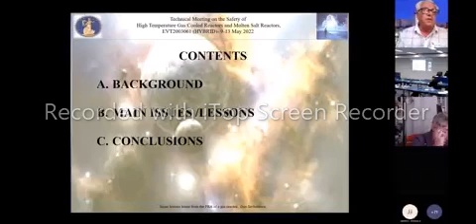I would like to draw your attention to the fact that many of the things I'm going to say may now look common, but these are lessons derived by 2002, 2003. It proves that they are more or less confirmed by further results of the community. So the background of this presentation, the main issues, and some conclusions.

The background is this experience from PBMR, but not only, because all my life I performed safety and risk analysis, real ones, at the grass level operation work. As far as PRA is concerned, PRA in PBMR was a real challenge because the target was threefold.

From one side, we had to derive a list of postulated initiating events, which was quite in clouds by that time. Another task was to support the design, actually to do it, not only to talk about it. And the third was to develop a PRA at least of class 2, if not class 1, in accordance with ASME classification, so that it can be used for licensing. That means it had to be in accordance with the standards, and we followed the US NRC standards, NUREG 2300, NUREG 1150, and so on.

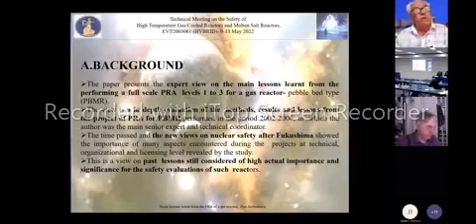On all aspects, including the way the team was composed, the organization, we were actually working as a project with limited budget, limited time and tasks, and people at various levels of knowledge requiring training. So this was a real life task.

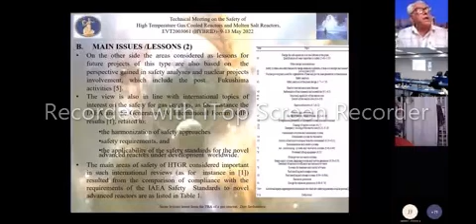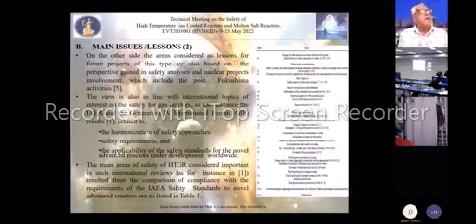Related to what we can derive from that, I realized later on, recently, when I looked in various IAEA documents, that more or less the topics I'm going to talk about are identified as issues which may require more attention, if not change, when we talk about gas reactors, in order to be in compliance with the existing IAEA guidances and requirements.

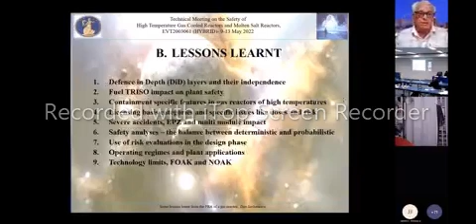These are the lessons learned. I will refer to 9 of them. There are a lot of them, but I thought these 9 are representative.

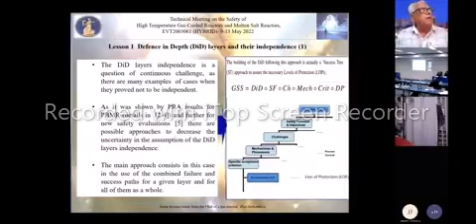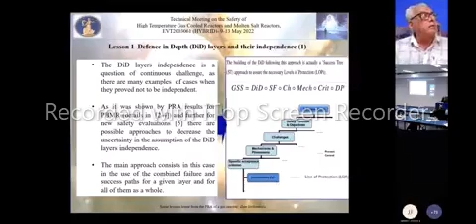The first one is related to the way we had to define what defense in depth actually is for this plant. Here we had to give answers to two types of questions. The first was how independent are they, and the second was what kind of method do we use to show that we cover the line of defense from one level to another, which, as you can see, may lead to a situation where we have an uncovered feature of a line of protection at one level, say level 3 or level 2, then it has to be covered at the next level.

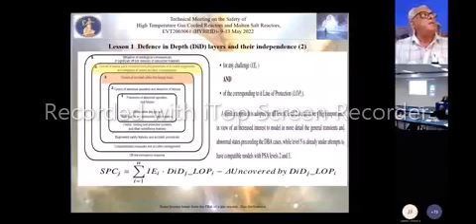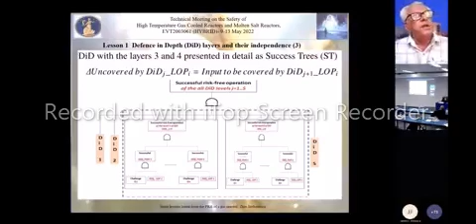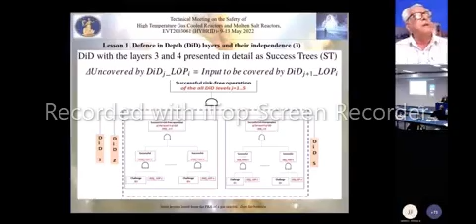So in order to model that, we can and we did use a combined approach. We didn't invent anything, because the combined approach of success scenarios, how to do it to succeed, and failure scenarios, which are the probabilities that the systems, the barriers assumed to assure the protection for a certain line of defense, will fail. So there's a combination of success and failure approaches. This was not new, and it existed, as you can see here.

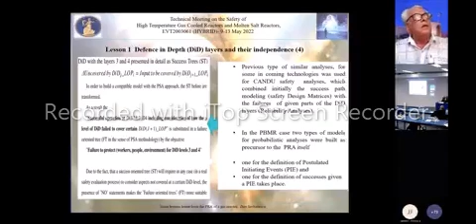I was inspired, I recognize that, from the CANDU philosophy, which in the 70s used this combination of success path modeling, the so-called safety design matrices, and fault tree modeling, the reliability analysis for important safety systems. From these two combinations, they were actually screening as completely as possible at this level of study the capability of the plant to cope with various initiating events.

Then we had to derive the list of initiating events, and for that we built a model. The model was built in RiskSpectrum in a network format for the whole team. We had 3 persons in the team, each with their tasks. We interacted with engineering and CFD calculation, deterministic calculation groups, and we evaluated a huge amount of scenarios for these success paths, and a huge amount of possible failure modes using FMECA and HAZOP for various systems and components. And this was the first phase of the PRA.

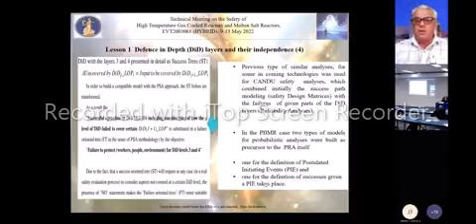Now, the second lesson is related to the fact that we realized from the very beginning that the important thing is not just having a certain number of barriers, and the way the levels of defense were defined in the IAEA documents, and this is proven and so on. But we thought from the very beginning that we have some special cases. For instance, one of the first barriers, which is the fuel, actually has more than one line of defense, so it has more layers in order to protect. So it is much more powerful than a normal thing.

And by the way, this thought comes from a project I am currently working on related to accident-tolerant fuel. The people who actually derived the BISO and TRISO concept, in my view, went on very solid ground in improving safety, in the sense that the first barrier, which is the fuel, is a very important one.

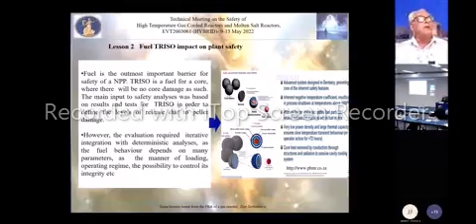So we modeled that, but in order to model the failure modes and the way we can consider that we have core damage, and what is core damage in such a reactor, we had to work closely with the engineering and safety calculation teams.

The third lesson, the second part related to those layers, was related to the containment. So what is containment in this case? As various comments mentioned even in this meeting before, we are dealing with an industrial source of risk.

Which has 500, 600 degrees Celsius, is a highly penetrable substance, and 80, 90 bars. How can we contain that?

That's why the concept of containment is on the functional level, as it was mentioned several times. It was not so obvious by the time we were working on that.

So in order to evaluate how the containment will behave, you will see here a drawing, a schematic drawing, but actually it was much more detailed, trying to figure out and show here the paths that could be followed by a flow.

In case that we have an immediate release and a delayed release.

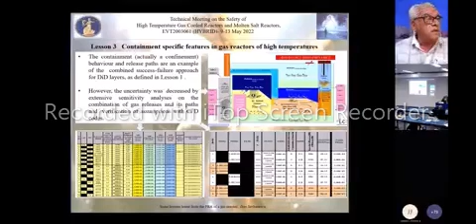And here you have a huge amount of files that look like Excel files, but they are actually versions of success trees in the RiskSpectrum model, in which we assumed the credibility of one path or another, a certain split fraction for a certain path, and we ran a lot of cases. The keyword here is sensitivity analysis, parametric sensitivity analysis. We performed maybe thousands of runs in order to evaluate which are the critical ones.

Then the next lesson was, why do we do that? Because in the third task we had, they almost didn't care about the level of knowledge of the team or the novelty of the topic. We had to deliver a PRA to send to the NNR, the regulator, to be approved. The requirement was that as an old plant, well known, which complies with the standards, at least in PRA, because this was our case, we were looking at PRA. So from this perspective, it was very important the way those licensing requirements were derived.

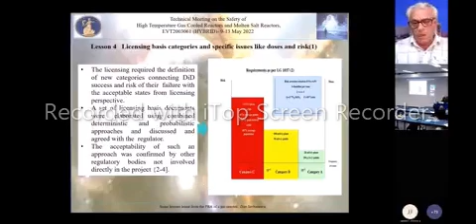We were part of the interaction of the PBMR team with the regulator in defining the rules for that, the various categories. I'm glad that I recognize that in other projects which were presented before, but again, this is 2002 when we were talking about that. And they were also formulated in figures.

So we did have some safety objectives, and we had to prove that through the PRA. Why did we follow PRA level 1 to 3, internal and external events?

Because the trend, even by that time, was obvious that for the next generation, Generation 4, core damage frequency becomes less relevant, LERF becomes less relevant, and the important indicator will be the total risk. So we needed to perform a PRA level 3 and deliver a product to that level.

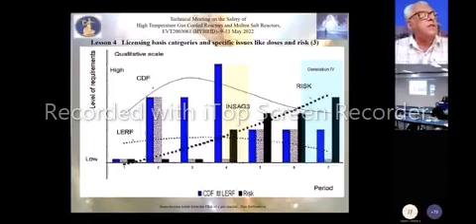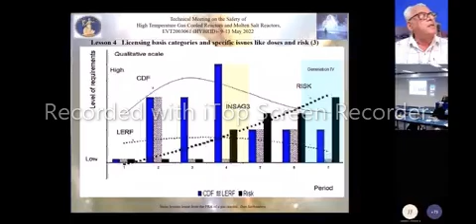On the other side, we had to have an integrated model in RiskSpectrum. This is a huge model, and it's a pity that the knowledge was lost. There are only some partial communications which are available. I listed them, but it was a huge work because we had to perform a lot of sensitivity analysis in order to show that we were complying with the safety objective.

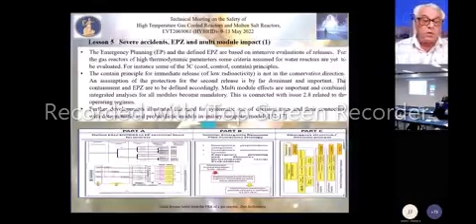The next lesson, which started by that time, but I am working on some of the follow-ups now when we deal with SMRs of other types.

Emergency planning. Basically everybody claims that there is no need for it. However, the requirement to have emergency planning exists, so you have to prove that you don't need it, or if you need it, of what type.

So for that, we built so-called decision trees, which are integrated with the PRA level 3 model. Imagine a decision tree, which is actually a subjective tree, integrated with the results from PRA in the same RiskSpectrum model, in order to derive the emergency action levels, based on which the levels for various emergency planning actions are derived. In the same model, we model the entities' actions and various operator actions in order to cope with various situations: alarm, emergency on site, emergency on surrounding area, and so on.

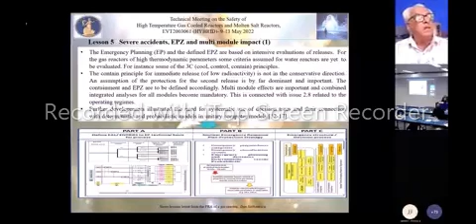An important thing to mention is that these evaluations actually trigger the question, also mentioned previously yesterday, related to how sound and applicable some of the Bible-type rules in safety are, like the 3C rule. How do we interpret the containment rule for the containment? I won't explain too much, but I showed some things we did, and mentioned that the delayed release is by far much more dangerous. That's why the important thing, in this case, is to show that you meet the safety objectives.

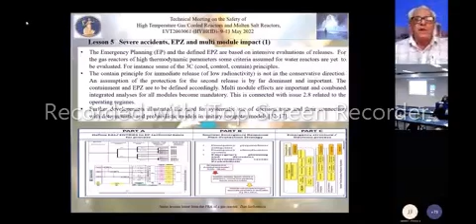Now, if we apply the probabilistic evaluation, for each of the zones we'll get a range, a lower bound and an upper bound. That range depends on the way the inputs were calculated. Again, this is a first-of-a-kind thing, so we obtain things which have extremely high levels of uncertainty. The key word, in my view, after performing all these activities for almost 5 years, is to perform sensitivity analysis, parametric sensitivity analysis, as much as possible.

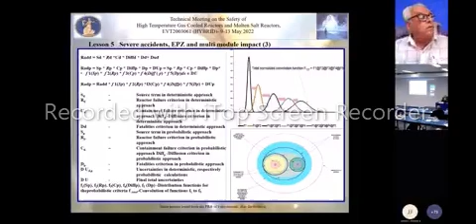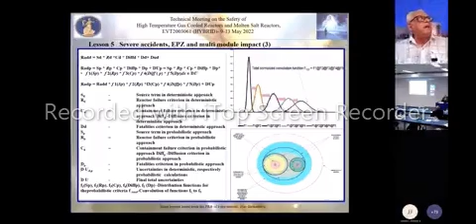If you do that, note that there are differences between the way we calculate those radii in a deterministic manner versus a probabilistic manner. When we calculate probabilistically, we don't just end up with multiplication of probabilities, we end up with convolution integrals, which is something different. When we talk about more than one module, we have to be careful about the way we define the radii, to be sure we don't evacuate people unnecessarily, because we are still in the range of uncertainty of the exclusion area, and because of that error range, we might take a wrong decision.

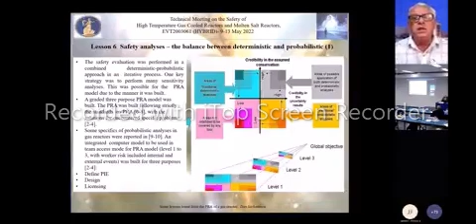Now, the next lesson is related to what kind of method to use, probabilistic or deterministic. This is something we derived for our purposes. This is an illustration of a lot of calculations and evaluations, which shows that it depends on what we want, it depends on what we have. So if we count on credibility in the assumed conservatism, and/or in the credibility of the uncertainty results, then we may have a quadrant of various possible combinations of uses of deterministic versus probabilistic things.

Depending, as you can see in the lower part, on the goal of that PRA, whether it is done for postulated initiators list derivation -- by the way, we had tens of thousands of PIEs, and then we grouped them, it's not only one, not only five, we didn't just guess -- we systematically took all the possible combinations using the method I presented in lesson 1, and derived this PIE. Then we used that for design.

I personally, together with the project manager, Henriette van Graan, were part of the change control board. So every time they changed something in the design, we had to run our model and say whether that would lead to an increase or decrease in risk.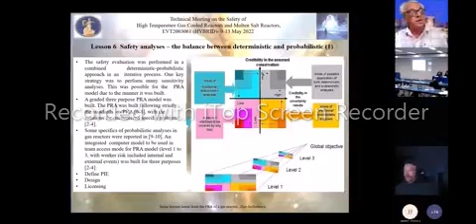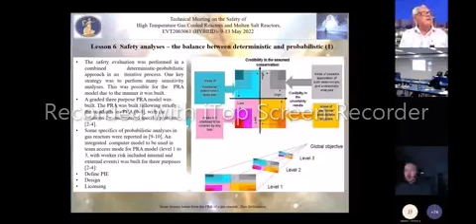This is the second application, and that's why the method depends on what we want, why we run it. And the last is licensing. In licensing, the regulators, at least in our case, almost didn't care about the fact that it's first-of-a-kind -- you don't have failure data. I see a lot of PRA communications about new types of reactors having simple questions like, how did you derive the failure rates for certain types of components?

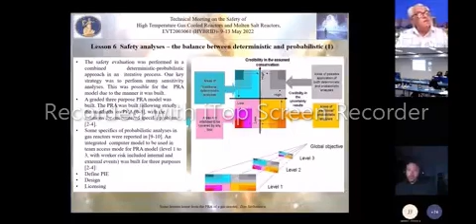For instance, in order to derive the failure rates for the pipes, we had a special contract with a specialized team from General Atomics in the United States, to make a translation from existing databases to the failure rates in gas pipes, in a helium pipe. So it's not so easy. Yes, you can write any number there, and that shows how far away from reality you are with your PRA model.

Now, when we combine various types of approaches, here we represented several groups of possible approaches, which are combined, probabilistic and deterministic, and the way their applicability depends on where you are when you look at the ratio between the risk you would like to achieve for that initiating event, or group of initiating events, and how the safety function is fulfilled.

In other words, what is the safety margin you have? If you have a high safety margin and a medium safety margin, you'll use one method. If you have a low safety margin, you'll use another one. Our conclusion was that if you have a low safety margin, go back to the deterministic analysis and then come back and do another iteration.

If you have at least a medium and high margin, then you may perform PRA because it will not be such a science fiction type of calculating probabilities in squares and lines.

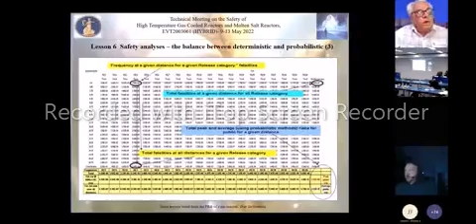By the way, we had to model also worker risk, and in order to do that, you have to have a certain maintenance policy. It's not a simple thing. This is a highly dangerous area where people have to get in order to perform maintenance. So how do you model that? We did have a model, not invented as much as the safety engineers groups gave us information. It was quite detailed and reasonable.

Now, the seventh lesson was related to the use of risk in the design phase. I mentioned something about that. It's in steps, iterations, and continuous work.

This is not only one model of PRA, not a model of PRA level 1. You have to take it to level 3 and have integrated models of internal and external events. By the way, integrating internal model of PRA with seismic PRA, for instance, or tornado PRA, is not a simple thing. I'll be glad to have discussions with experts in PRA talking about that, because it's a huge, new, in many cases unknown methodology to do that.

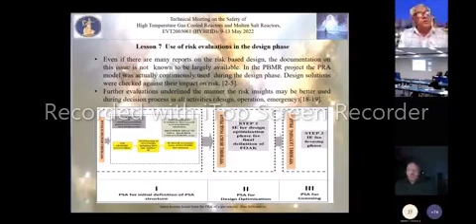Not talking about the fact when you talk about multi-modules. So the PRA first starts from the type of sketch I mentioned in order to derive the list of initiating events.

Then we developed a model for the design optimization, and we actually used it. We have even communicated papers with real cases when we were asked about the impact, and we gave an answer. Using this model, we then had to develop a model for the licensing, and we did that. It was reviewed independently by a United States consultant coming from the General Atomics branch, and it seemed that we are on the right track.

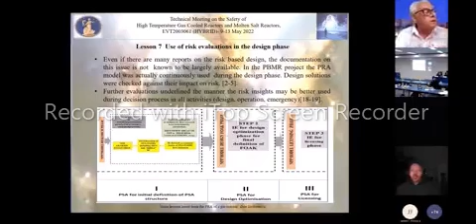So we are not quite close to level 1 because we didn't have databases and many other things. That's why I'm very reluctant when I hear about the fact that, yes, we perform PRA and so on, and it's the first of a kind, and they don't mention that. I'm reluctant in the fact that even the magnitude of the problem is understood. We did that for this level of knowledge by the time, with the limitations that resulted from here, and the lessons learned for the future.

The fathers of PRA mention something, there are two lines in NUREG 2300. When you start something from scratch, you just have a diagram, a thermodynamic diagram, a reactor physics diagram of that. So the first indicator you have about possible areas of risk increase is more or less in compliance with the axis of loss of exergy, loss of entropy within that cycle. And I added here the idea also of loss of control, because this is a controlled installation, a controlled thing.

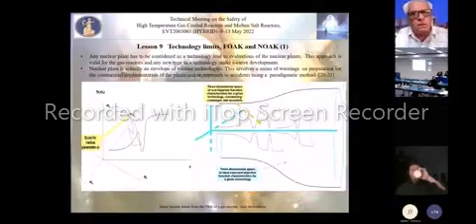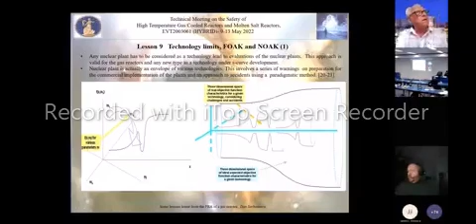The last lesson is related to the fact that we are talking here, and maybe I missed this, we are talking only about the plant and only about the nuclear technology. Nuclear power plant is a technology. That's why it complies with an S-curve, because it is a technology. So it has the beginnings, then it has the improvements, and then it has the asymptotic stage, and it has the end.

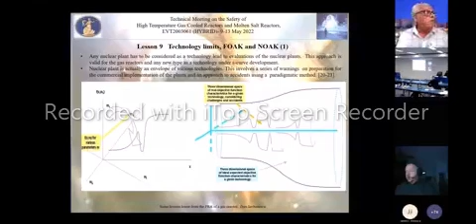So, in the meantime, from time to time, it has some bumps, which are the accidents, which show how different is what we think we got by comparison to what it is.

And we go back to the drawing table, as it happened last time in the Fukushima case. That's one thing. Another thing is that this is a technology - not only the technology of reactor core or thermodynamic cycle, it's an envelope of technology. There's the technology of I&C, manufacturing, managing, leadership, and people. A lot of technologies.

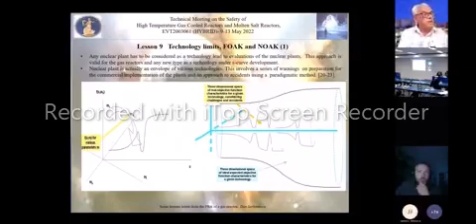There's a lot of science here within a nuclear power plant. And that's why, not talking about the fact that nuclear power plant is not something isolated, it has a front-end part of the cycle and a back-end part of the cycle. So we have to have all of that in mind when we evaluate a plant.

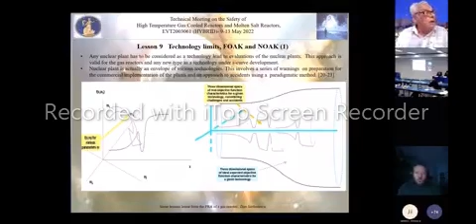And here is an illustration, a more detailed illustration. You may find in the things I referenced details, and actually for all of those I have detailed presentations in the links included in the beginning.

Which show that we moved in our... yes, we did have accidents. We did that because we usually make confusion between FOAK and NOAK - usually we are paranoidally optimistic, and we discard the fact that we may have accidents. And we did. So far there were 5 major accidents, which actually brought us down to the ground and forced us to rethink many things, including the last one.

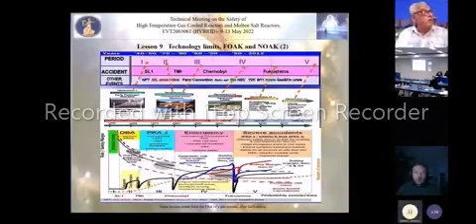Every time, the safety paradigm changed. Now we have one, and we will change it also. I could have predictions, but I will not state them.

And the last thing I wanted to show is that nuclear is not in an isolated globe. It's in the context of the industrial revolution we are going to face. So we are building now a plant for 50 years, 60 years - 2090, 2100. This is going to be Industry 4.0.

This is not only robots, this is artificial intelligence. There will be many types of management - who knows which types - and leadership. But mainly there will be other people.

So now when we design - and I'll give this example because usually it's almost absolutely discarded - when we design a control room, we actually forget that it will be used by somebody 20 or 30 years from now. How the world is going to look like, how the people are going to look like, which will be their abilities, which will be their limits. I think this is also to be considered, especially on this generation 4 type of reactor.

So we actually discard the fact that maybe in 20 years manufacturing will count on nanotechnology and printing procedures. But we still consider and take into account the same technology as before. No - not talking about the people, as I mentioned.

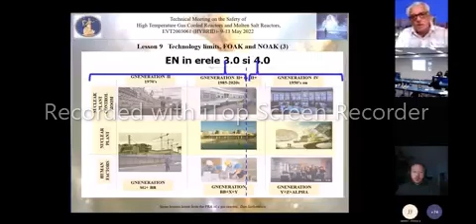So the conclusions are that, yes, there are lessons. Many of them are applicable to many other types, not only to gas reactors. For the gas reactors, we could feel comfortable that our judgment was correct in 2002, and many of those things are now confirmed and studied in detail. Thank you very much.

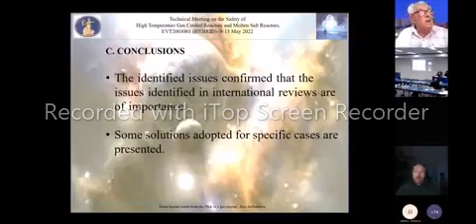Thank you very much. Some very insightful observations and some key considerations for us going forward.

I don't see any questions in the chat. Does anybody in the room have a question or a follow-up observation for Dan? Yes, we do. Please, Karen - Karel Knopper, Tractebel.

Thank you for a very, very interesting presentation. I was wondering, from this exercise back in time, did you have any specific lessons learned on how to look at the passive safety systems in the PRA, and also in relation to external hazards?

Yes, I think there are two questions. For the passive features, we had a contract with Technology Insights. They applied Markov chain technology in order to model the passive failures. One of the applications of this methodology was related to failures in the pipes, and the figures we got were derived based on this methodology.

The second part is for the external events. We did have a big challenge. By the time we developed the model, it was not yet customary to have integrated models of external PRA into seismic PRA, for instance, into the internal model PRA, because it's a question of technique - the way you include various logic trees, switches, and so on.